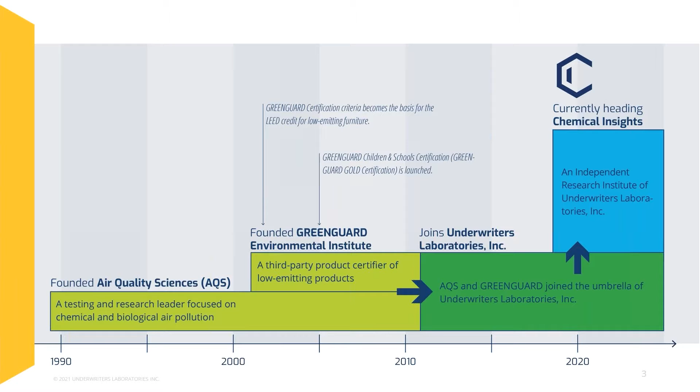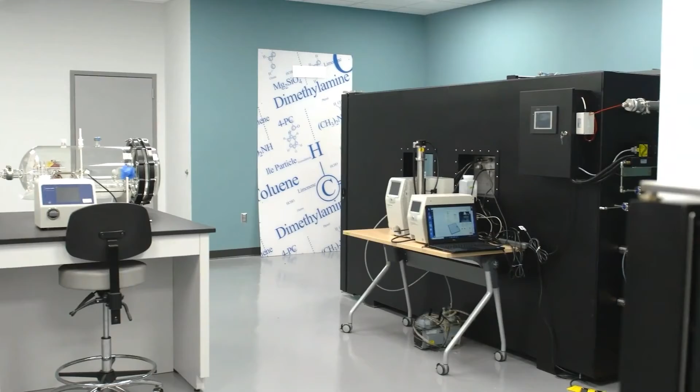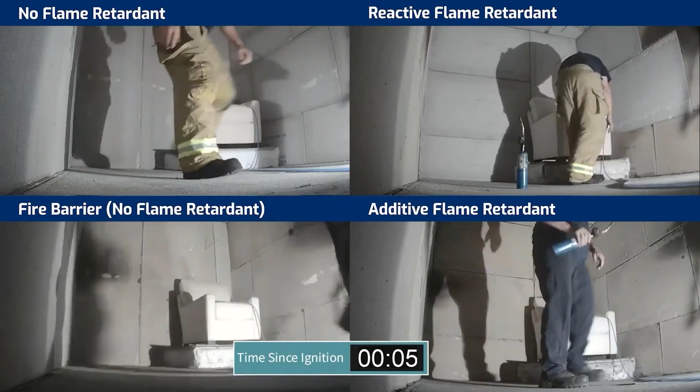One of the technologies that is core to our science are what we call environmental exposure chambers. This was something that was developed a number of years ago by Air Quality Sciences, but primarily environmental exposure chambers allow us to study products under realistic conditions and understand what sort of chemicals, particles, toxins might be being released into the indoor environment so that we can manage them and reduce the hazards. So currently at Chemical Insights, we have a laboratory that houses these exposure chambers of different sizes. We have capabilities through our partnership with Underwriters Laboratories that allow us to expand that and look for other particular hazards such as fire hazards, and gives us a lot of capability to study products and the impact of these products on the indoor environment.

So as we move ahead for today's particular activity, you're seeing a few slides of some of those activities, but we'll be talking about some of these studies and what we've learned in our research that we can apply to ensuring that we have safe environments for all.

Our particular approach to what I call discovery research, we're trying to gather information to fill in the unknown gaps. And the way we do that is, first of all, when we believe there's an issue, we convene stakeholders to help us define what those health risks are and what we can do to establish a research agenda to bring data forward to help us resolve the problem. And once we define that research agenda, we conduct the research, we analyze the data, confirm our findings, and then we share our discoveries with all stakeholders. We're very transparent in all the work we do and want to provide that information out so that everyone can use that to the betterment of their initiatives and people overall. A lot of our work leads to the development of standards or guidelines or issuance of best practices for not only the safe commercialization of evolving technologies, but also making sure that we have safe built environments for all.

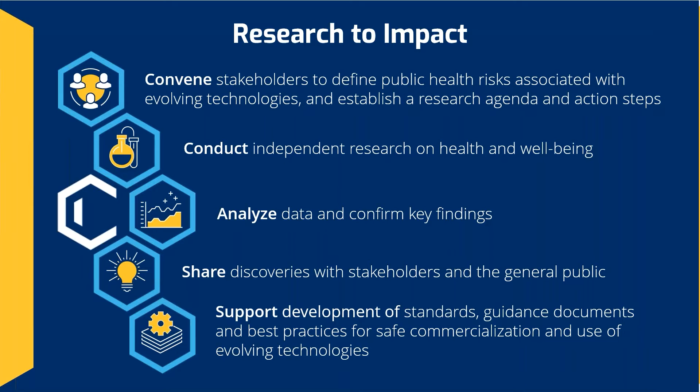So today we have some specific learning objectives. We're going to talk about the expanded role of the designer, kind of as a pioneer with today's opportunities. We're going to identify the health effects of chemicals and respirable particles, things that we're finding in our research. We're going to relate this information that we're finding in our research to best practices, especially for reducing chemical exposure. And we're going to connect all of that information to the practices and guidelines that we have available that you can apply in your day-to-day work in helping us protect building occupants.

So what's the agenda? Well, we have four particular areas we're going to talk about. What's really contributing to poor indoor air quality, what the designer's role can be in helping support positive and healthy indoor air quality. And we're going to talk about emerging risk. What are some of today's emerging risks out there that are contributing to poor indoor air quality, and what sort of mitigation strategies do we know now that can help reduce that risk? And then we'll lead to conclusions and what next steps, and answer any questions that you have.

So first of all, what is contributing to poor indoor air quality? Indoor air quality is very complex, but we do know that indoor air pollution is a public health concern. We know that overall 7 million folks on a global basis die from poor air quality in general, and that's both indoor and outdoor air quality. And the effects of poor indoor air quality in particular can be very significant. We've been studying this issue since the early 1990s, as I indicated earlier.

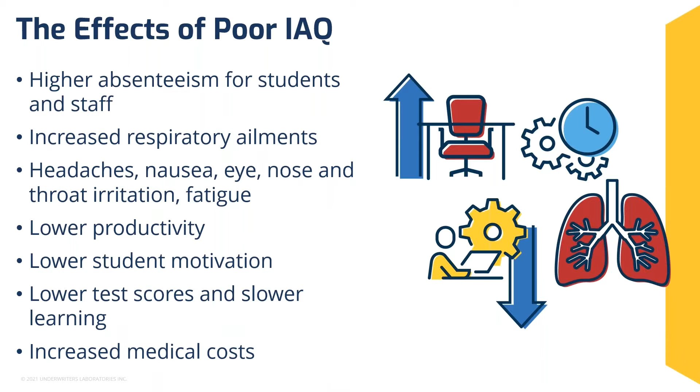So what are some of the common pollutants? Many of you are probably aware of some of these, but pollutants arise from just about all of the building materials and activities that we have going on in buildings. We have pollutants called VOCs, volatile organic compounds. Those are the volatile chemicals that get in the air that you can easily breathe. Many times they have odors. You can smell them, especially from newer products. VOCs, commonly you'll see them from surfaces, flooring, paints and coatings, furniture, all of the types of materials you see there.

And then we have a second category called semi-volatile organics. These are organic chemicals as well. It's just that they are not as volatile, so they don't end up in the air at the higher concentrations that we typically see VOCs. They are in the air, but they also commonly settle into building dust. And because they settle into building dust, people can get them on their hands because they're on surfaces, et cetera. Your hands go to your mouth, and so you can get ingestion of these. These are chemicals like flame retardants, phthalates, PFAS, which are per- and polyfluoroalkyl type chemicals that you're hearing a lot about these days.

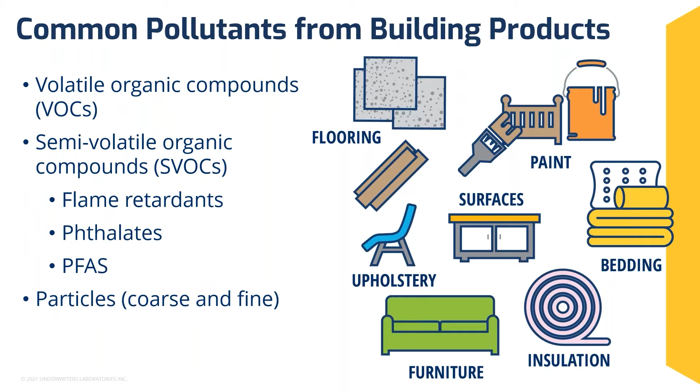So relative to the pollution that we deal with, we believe that you as a designer have a significant role to play. If I could have the next slide. Oops. Oh, okay. All right, I skipped over a slide and I apologize.

So we were talking about pollutants and the particular ones that are there, the VOCs, the semi-volatile organics, the particles, but there are also things like molds and allergens, dust mites, typical molds in general, other biological pollutants like pet allergens and things like that, and carbon monoxide that can also end up in the air. So in general, indoor air quality is a very complex mixture of all of these together, relative to what's going on. And what are some of the known health effects of that?

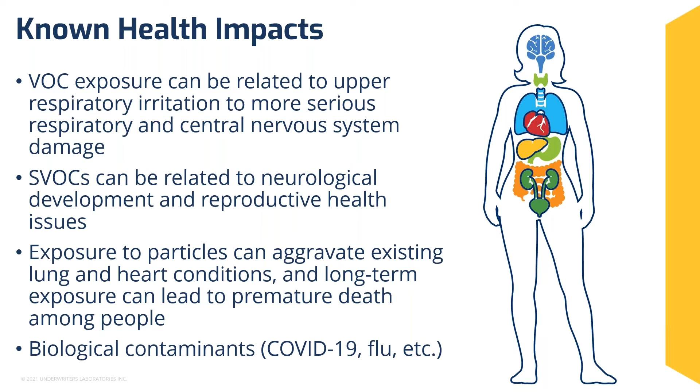VOC exposure definitely can be related to upper respiratory irritation, especially the lungs and pulmonary system. And if they're there in high enough concentrations, they can also affect the central nervous system. That's why you commonly get headaches and things like that. The semi-volatile organic compounds that we talked about can be related to neurological development and reproductive health issues, especially for children. Exposure to particles in particular can aggravate existing lung and heart conditions, and long-term exposure to these particles can lead to premature death. Biological contaminants have definitely come into our world, and we've become very aware of them from COVID-19, viruses, flus, as well as the other allergen type contaminants that we were talking about.

So as we move on to that discussion, we need to understand how people are actually exposed to these pollutants. And there are three primary routes. You can be exposed to the pollutants from inhaling them. You can be exposed from ingesting them, meaning you primarily get them on your hands and your hands touch your mouth and you get them in your system.

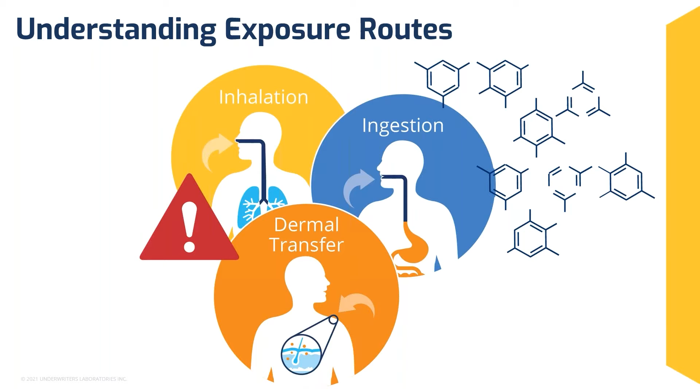And then we have the potential of what we call dermal transfer. So certain chemicals, and flame retardants are one of those, where if you touch a particular product that contains those chemicals, in some cases they can migrate out of the product through your skin and into your system.

So one of the things to remember about pollution exposure is the most effective way to control indoor air pollution is to prevent it, and especially prevent the emissions from all of the products in the first place. We do have ways to manage indoor air quality, and there are four basic ways. And if you remember these four basic ways and take approaches to deal with these, you can really reduce the indoor air quality hazards in indoor spaces.

First is having proper ventilation and filtration of the air supply coming into the indoor environment. The second is controlling moisture. Ideally, we like to have a relative humidity of about 40 to 60% in buildings. We want to make sure we don't have any uncontrolled water leaks long-term that can lead to mold growth and exposure. Cleaning the building, having a consistent and well-defined process for cleaning.

And then the fourth is source control, controlling the sources that you bring into the building. We'll talk about some of these in more depth later. But those are the four primary ways. And what we want to do today in the second part of our course is really understand your role in supporting good indoor air quality, what you can do to help your customers and organizations do the right things to promote good positive indoor air quality and maintain occupant health.

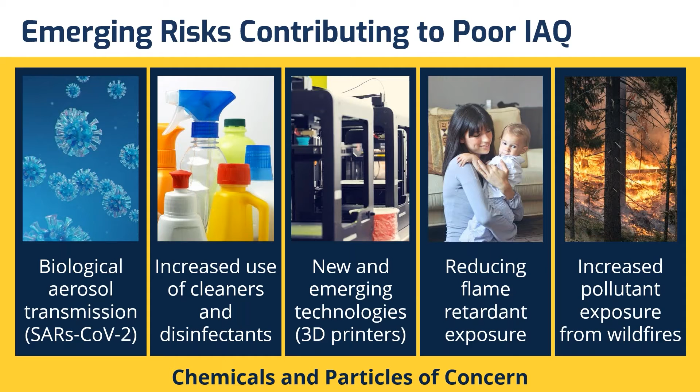So part 3, we will get into each of those emerging risks and talk about them a little bit more deeply. The first are biological aerosol transmissions, again, like SARS-CoV-2. You have to understand aerosols in order to understand what's going on. Aerosols are very tiny particles or droplets that are suspended in the air. And they exist everywhere. We have all kinds of aerosol droplets in the air at any one time. They can come from natural sources or they can come from man-made sources. Unfortunately, some aerosols are detrimental to human health when they're so small that they can be inhaled and deposited into the respiratory system.

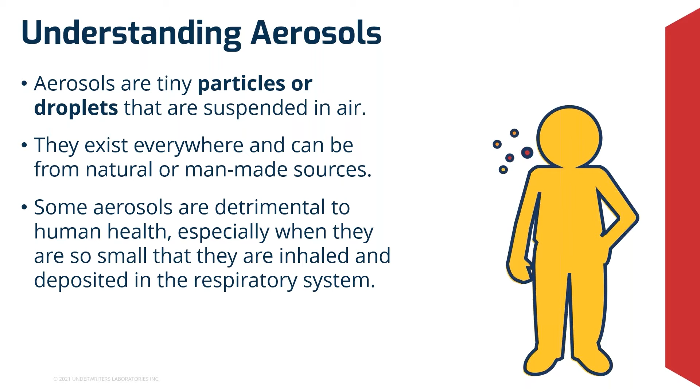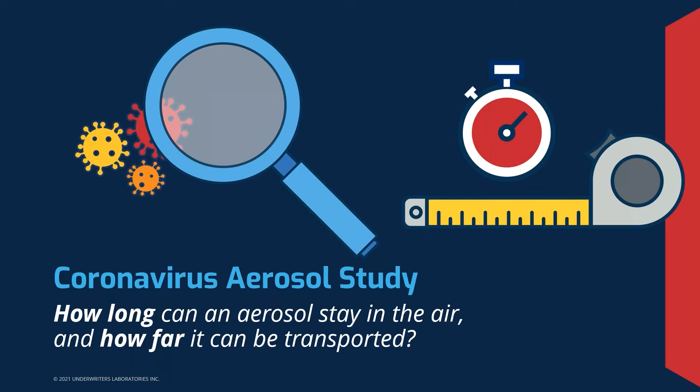We conducted some of the early coronavirus SARS-CoV-2 aerosol studies, where we really wanted to understand how long aerosols could stay in the air. Because if they're in the air, you can be exposed. How long can they be there, and how far can they be transported, and what can that mean? Unfortunately, the dynamics around that particular question are very complex. And the answer to that is based on a lot of different factors. It's not easy. It depends on what the droplet size is, what type of ventilation you have in the space, how rapid the air is moving, how much air is available, what the temperature and the moisture is in that particular air.

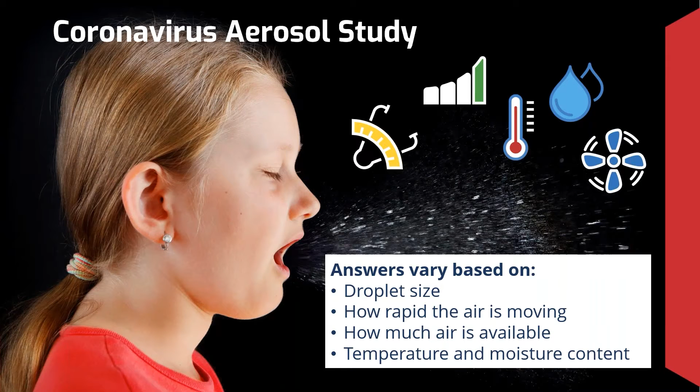So what we're concerned about really are the very fine aerosols, and they can stay in the air from a matter of minutes to days, depending on these particular factors. And in today's world, it's hard to have all of the science to go out and measure those factors so that you know what sort of exposure you are getting. But we do know that the very fine aerosols that get in the air can be there for an extended period of time. So what's the best way to deal with that?

The best way to deal with that, as well as any indoor contaminant, is to dilute the contaminants with good airflow and good air ventilation that's constantly working. And that's much better than using a disinfectant trying to deactivate or kill a biological aerosol, which is a one-time event. Good ventilation is the key to reduction of the risk.

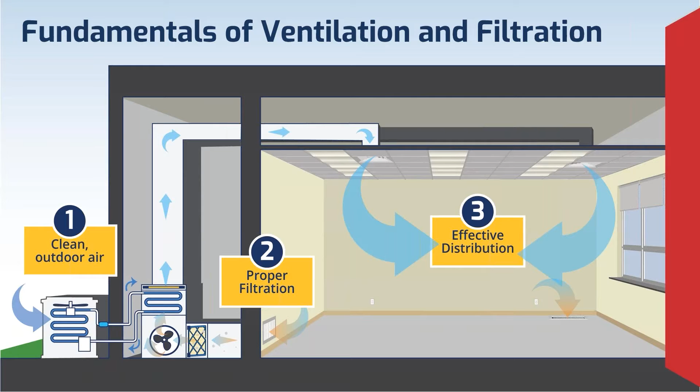So what are some of the fundamentals of ventilation? Well, first of all, you have to supply clean outdoor air to the space. That means bringing in the outdoor air, filtering it properly with good filtration, making sure that you have the highest MERV rated filter that you can, and then making sure when that air enters into the space that it's effectively being distributed down to the levels where people are, whether they're standing or sitting at a workstation and working, that the air gets down to them and moves around them. If you have those three factors, it really makes a big impact on diluting those contaminants, getting them out of the space, and keeping the reduction of the risk effective for the people in the space.

I also wanted to mention this particular phenomenon because some of you may see this going on. There's a lot of use of physical barriers out there in the space, and this is a complex topic because physical barriers in general only serve maybe to stop big droplets that might be coughed out or sneezed. But unfortunately, if those big droplets hit that barrier, they can basically implode and result in many small particles which kind of just go around the barrier. So the use of them would be very, very complex in this particular situation. And in many cases, they may create more harm than good. We know from many studies that the use of high panel systems and office furniture in those types of scenarios reduce ventilation around the people and allow pollutants to increase in quantity. So be very careful with the use of this particular technology.

The next technology I'd like to talk about is air cleaning. A lot of people are using standalone air cleaners in the indoor space, which in many cases can be very good. It doesn't take the place of good ventilation, but it's a good supplement to ventilation. And what do you look for if you want to use air cleaners? Well, first of all, you want to make sure that those air cleaners have been verified by a third-party organization, have a good clean air delivery rate, good HEPA filtration, high efficiency particulate filtration, an activated charcoal filtration opportunity to remove volatile organic chemicals, and that the unit can clean a sufficient volume of space, particularly the space that you're in. And you want to make sure that these units do not introduce ozone into the environment. Ozone is a very strong pulmonary irritant, and we do not recommend that any air cleaners be used that introduce ozone into the space.

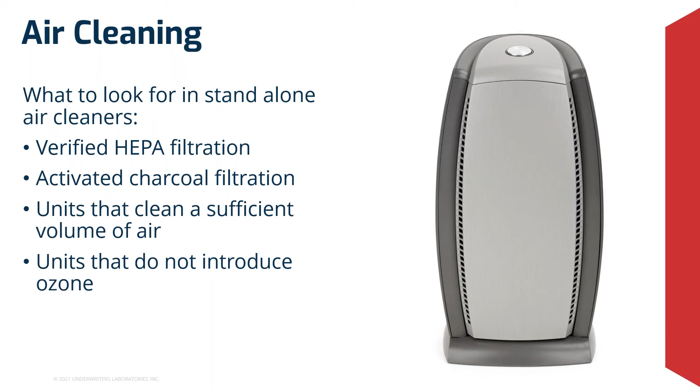So the rule of thumb for air cleaners is that you look for one that has a clean air delivery rate for 2/3 of the volume of the space that you're trying to clean. I've been into schools and places like that where teachers may have a really small air cleaner sitting on a desk, and that's not going to do anything. You've got to have an air cleaner that's really designed for the whole volume of the space. And as I said, rule of thumb, make sure that it's verified to clean 2/3 of that volume.

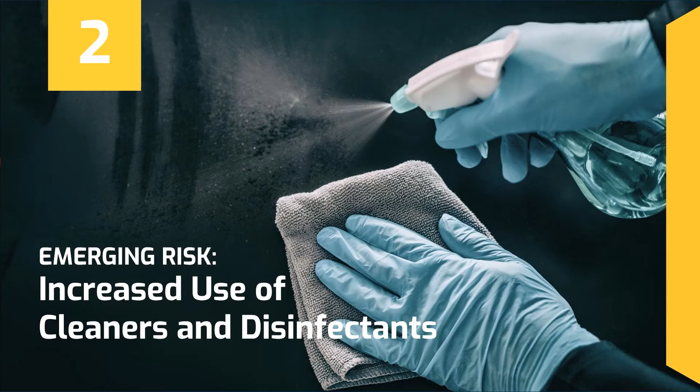The second emerging risk that we're going to talk about is the increased use of cleaners and disinfectants. With COVID-19 and exposure to SARS-CoV-2, we've seen the push for using cleaners and disinfectants in indoor environments. Cleaning gives everybody kind of an "I feel safe" type of scenario. But remember, cleaning is only a one-time event, and cleaning itself, cleaners in particular, can have a negative impact on occupant health, primarily because of their chemical composition.

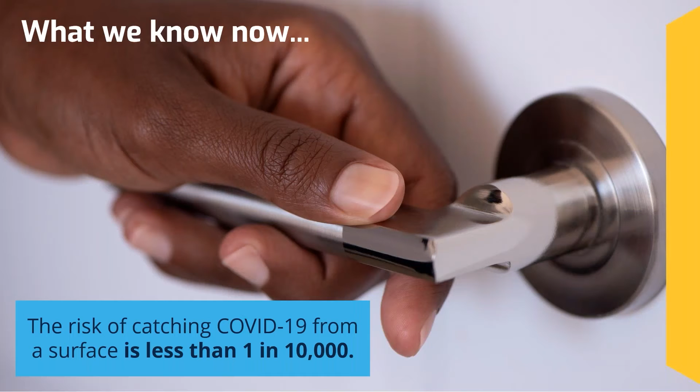And it's important to remember, and this is something we've learned through COVID-19, that the risk of catching COVID-19 from a surface is less than 1 in 10,000. So typically, that's not how people are getting it. What we learned is that SARS-CoV-2 is spread primarily by very fine aerosol droplets in the air that people breathe, not from what they touch. Still, it's wise practice from a cleanliness standpoint to clean frequently touched surfaces such as door handles and bathroom fixtures and things like that.

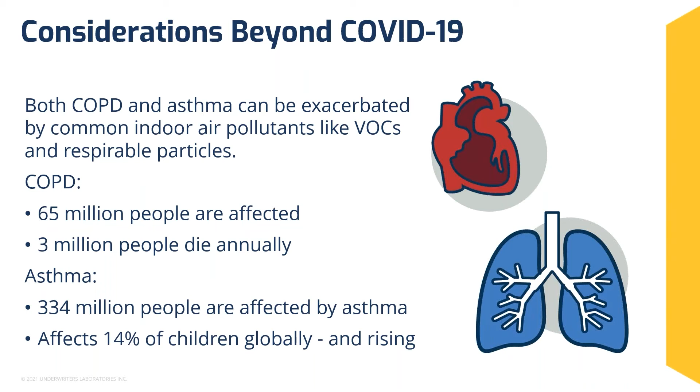Asthma still remains one of the most significant chronic diseases among children and is still the leading cause of absenteeism and emergency room visits by children on a daily basis. And those diseases are also caused by the same things: biological aerosols, chemicals and particles in the air.

Now, what are the primary steps for an effective cleaning and disinfecting process if those are going to be used? And we do recommend that they be used, but in a controlled fashion. First of all, one of the best things to do is to use HEPA vacuum systems, high efficiency particulate air vacuum systems, where you vacuum your floors, textiles and furniture, that you focus specifically on cleaning the high touch surfaces and countertops and things like that, but only use those cleaners in well ventilated spaces.

Make sure you open windows, you have your air ventilation systems on, that you implement routine cleaning programs, that you have a very defined cleaning process. How often are we going to do it? What are we going to do? What are the materials we're going to use? What are the chemicals we're going to use? That you have those defined.

So those are used routinely, and you don't want the situation where people are just bringing their chosen product into the room to clean. We certainly recommend practicing source control. Make sure that the cleaners you bring in are approved by EPA's safe product list and have low emitting, non-toxic chemicals in them.

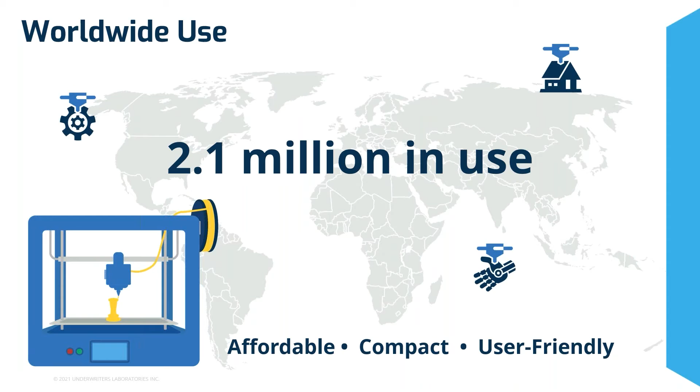non-industrial sort of environments. Unfortunately, through our research, what we've learned is that during the operation of these 3D printers, they do generate a complex mixture of airborne particles and volatile organic chemicals that can end up in the air and provide a complex aerosol for people to breathe. And what does that mean? Well, it means they do present a hazard.

And in particular, when people stand close to them, they're in a situation where they're close to all of these emissions and have minimal ventilation at the particular time. So they do present a risk. We have found through our research that there are hundreds of different VOCs that are emitting, depending on the type of filament that's being used and what's being printed and the length of time a printer operates.

And these chemicals, some of them are irritants, some are carcinogens, meaning they cause cancer, some are odorants with very strong odors that can affect people's health and produce headache and that type of thing. The type of VOCs and levels will depend on the specific printer type as well as the filament in general and the amount of ventilation that's in the space.

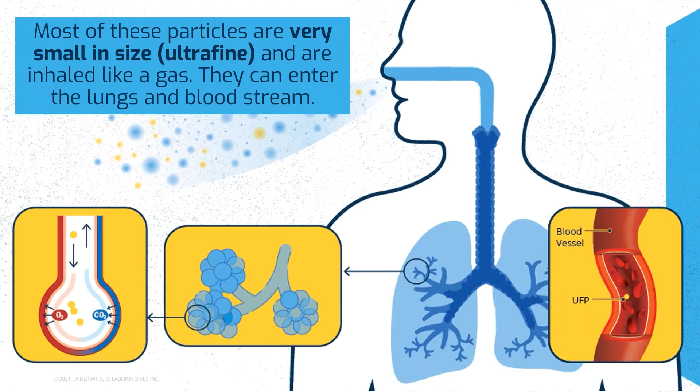Now, in addition to the VOCs, the other emissions released by these 3D printers are the very small particles, and these are called ultrafine particles, and they are inhaled into the pulmonary system just like a gas. And because they're so small, they can enter the lungs and the blood system. They can even get into the bloodstream, which means they can make their way through the body and up to the brain. And just about all 3D printers are emitting these ultrafine particles.

But 3D printing, again, is a great technology. We want to encourage the use of it, but we want to encourage safe use of it. So what are the things you can do in situations where these are being used in the indoor environment? First of all, purchasing. You can have a good purchasing process that defines the 3D printer that you want to purchase, making sure that that 3D printer essentially has been verified to low emission status, and that you know who you're purchasing it from, and that you also specify the right filaments that have been defined by the manufacturer for that particular printer.

You want to make sure you locate that printer in the indoor environment in a space where you are getting a lot of good air ventilation. You may have local exhaust that can take the exhaust out of the building. You may have just good building ventilation that can mix around it, or you might be able to open a window. And then you just want to limit the exposure opportunity for the people that are there. Keep them away from the operating printer. So those are the best approaches you can use.

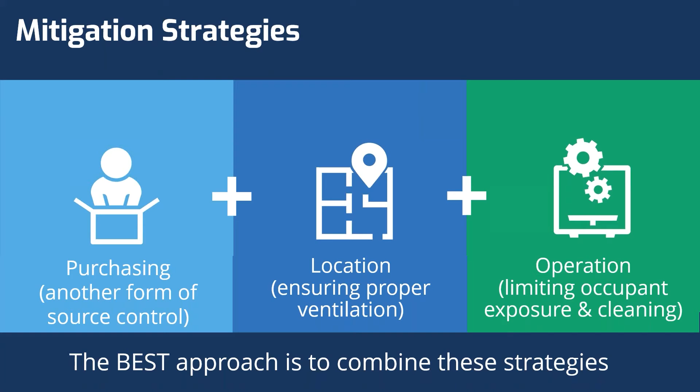And from the safety standpoint, we have various control strategies for minimizing the hazards associated: location, purchasing controls. And beyond that, we can get into more significant engineering controls as we talked about, exhausting printer emissions. Some printer manufacturers now are providing exhaust systems with those printers.

And, you know, we can even get down to requiring personal protective equipment if necessary, but obviously we want to avoid that in the non-industrial environments, and we can do that through some of the control processes we've been talking about. So purchasing, and I said select printers and filaments that meet low emission status. There is now a standard in the marketplace. It's an ANSI standard 2904 that defines what a low emitting 3D printer is.

It has a list of just under 100 different VOCs and criteria, emission criteria that printer has to meet. And printers can now be verified or certified by third-party organizations to meet that standard. So we say, make sure you consider printers that are being tested to that particular standard and have the verification information. And you can also put that into your purchase specifications. You can consider printers that have the integrated enclosures that have an exhaust system, filtration system. They are available, but only choose them if they've been verified by the manufacturer to work.

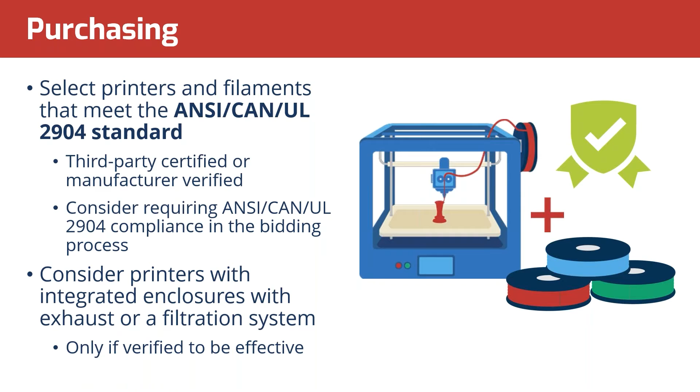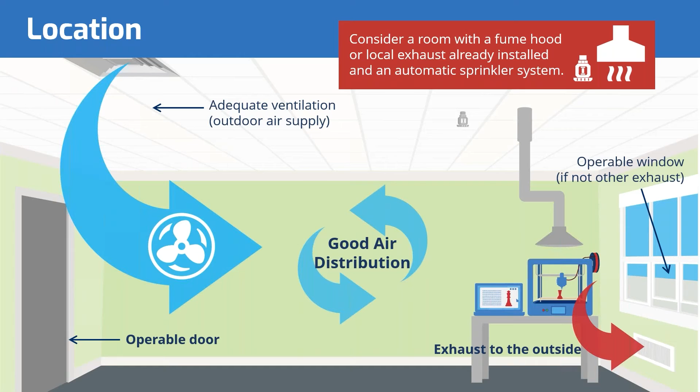Now, location, which was the second control strategy, again, making sure that it's put in a place where you have good air, you have an operable door, you have good clean air coming in, that air has good distribution through the space around the printer, and that the printer be located near a window that you can open if that's an opportunity, or potentially with a local exhaust that can exhaust the emissions to the outdoor air.

Operation of the printer is extremely important. We want to keep observers away from the operating printers. So some ways to do this are to consider the hours of operation. Some people are actually putting cameras on these so that children in particular or observers can see. They like to get in and see the objects being printed. So you can actually have a camera that people can observe and see that without having to get up close.

It's important during operation of these that the surrounding environment is kept clean, and that's cleaning the surfaces with a wet cloth, vacuuming with HEPA filtration, and anyone involved should wash their hands after working with the 3D printer and various filaments, so that you don't get that ingestion type of exposure scenario that we were talking about before, from your hands to your mouth.

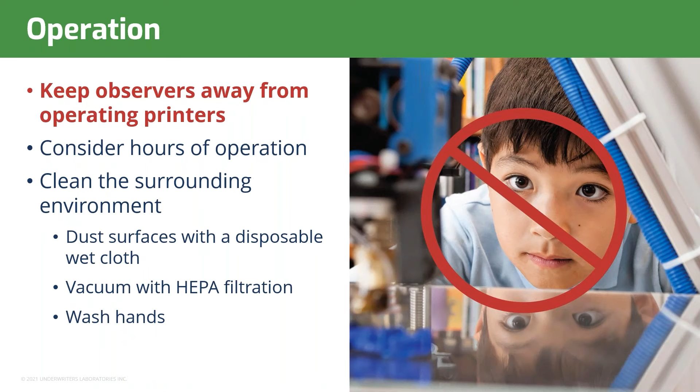So what's another emerging risk? Another emerging risk that we have been focused on is how to achieve both chemical safe and fire safe upholstered residential furniture. And when we think about it, a lot of people don't think about fires these days, but we have a significant number of residential fires. And when a death from a residential fire happens, can you guess what the leading item is to first catch fire if there's a flame available?

And probably when you're thinking about that, I don't know what you're thinking. You may think bedding, you may think something flammable like gas or some sort of object that may be associated with cooking. But in reality, when the flame is present in a residential home from any source, could be from a candle, could be from an electrical spark or anything like that, the first item to catch fire is upholstered furniture. And we have a lot of upholstered furniture in our residential homes. But it is the first item to catch fire, and it is associated as a leading cause of death from residential fires.

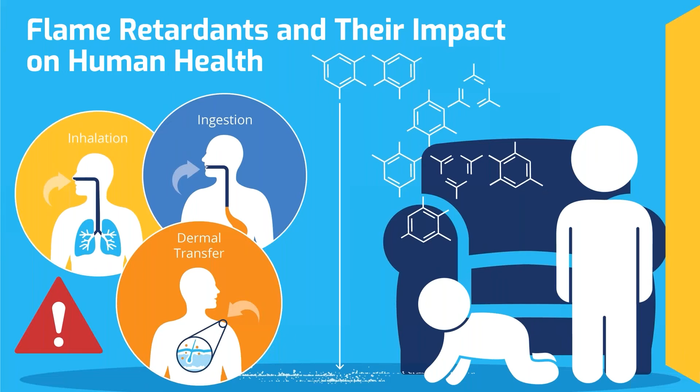So as a result of that, we know over the years that flame retardants in particular have been put in our consumer products, not only our residential furniture, and more specifically the polyurethane foam padding, because that is an organic fuel source for fire. Flame retardants have been added to many, many other consumer products in our homes as well, basically to retard or delay the ignition of a fire. But we've learned through the years that flame retardants can have significant impact on human health, and that people can get them through inhaling them, through ingesting them, or through dermal transfer as well.

So we have studied this particular issue very significantly. We wanted to understand how people actually were getting exposed to flame retardants, at what levels they were being exposed to flame retardants, and what we could do to reduce exposure to flame retardants, yet maintain the fire safety associated with furniture, since it is so flammable.

And so we actually studied this over a 5 to 6 year period with various academic institutes, where we manufactured upholstered furniture using different techniques with and without flame retardants, with some of the newer flame retardants called green flame retardants that get absorbed, that are structurally attached in the foam and don't have the ability to bloom out.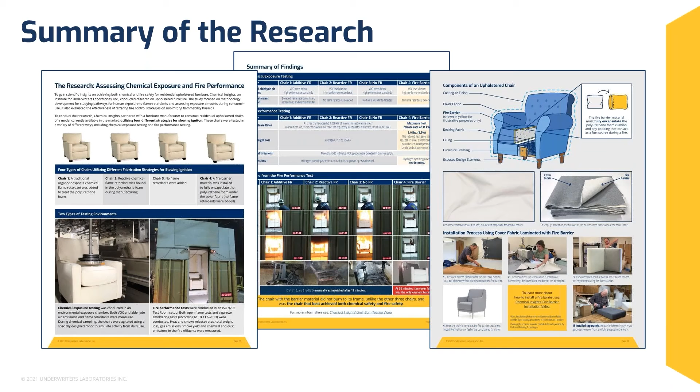So we learned a lot from that particular research, and we learned that in general, flame retardants weren't necessarily necessary. We didn't see much difference in the burns of the furniture if they did or they didn't have flame retardants. And so under that scenario, the question, well, why are we using flame retardants? Okay, well, let's not use flame retardants. But what we learned is that if we weren't going to use flame retardants, we could use a barrier material that had a significant and remarkable impact on the reduction of fire from the burning of upholstered furniture.

So this particular video that we're going to show you shows you how a fire barrier is actually installed in residential furniture.

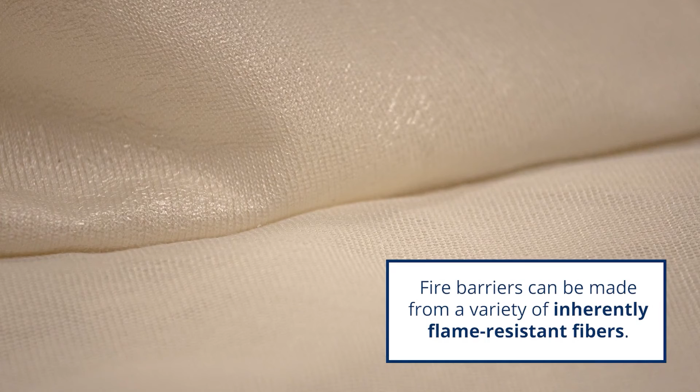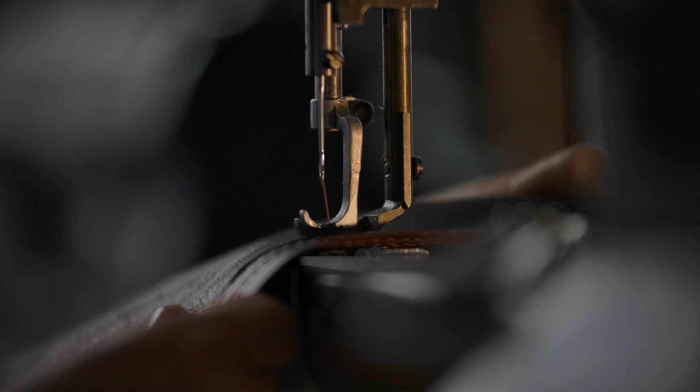New research has found that use of a fire barrier in upholstered furniture successfully addresses fire safety concerns without the use of chemical flame retardants. So how does a fire barrier get installed on an upholstered chair? Let's take a look. Fire barriers can be made from a variety of inherently flame-resistant fibers, including carbons, polyesters, and fiberglass. These barriers should be soft, pliable, and drape well for optimal results. The process of fabricating the components has two options. First, the barrier can be independently installed, followed by the addition of a cover fabric. Alternatively, the barrier can be laminated to the cover fabric so both are installed together.

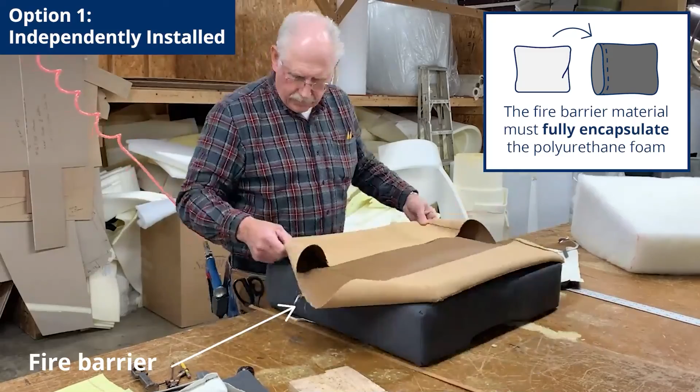The fire barrier must fully encapsulate the polyurethane foam or cushion of the chair, which can act as the main fuel source during a fire. The fire barrier is designed to prevent or delay ignition and can successfully reduce the fire growth rate and fire size if ignition does occur. Once installed, the fire barrier will not impact the final look or feel of the upholstered furniture. The fire barrier offers a solution that achieves the convergence of chemical safety, fire safety, and peace of mind.

Okay, so fire barriers are currently available in the marketplace to be used. And taking all the knowledge that we learned from this research and with a strong advisory group from the design, manufacturing, and public health stakeholders that were working with us, we produced 2 documents on this research. One is a guidance document on how to manage fire and chemical exposure risk associated with residential upholstered furniture. It gives a little bit of detail into the research and our findings and application of that.

And then we took that and created a toolkit specifying residential upholstered furniture to safeguard human health and well-being, specifically for designers and users such as yourself to understand this particular issue and the simple decision process that you can go through to achieve the safety level needed for your particular clients. We had this document reviewed by the American Society of Interior Designers, their advocate for design council, and we were very appreciative of that.

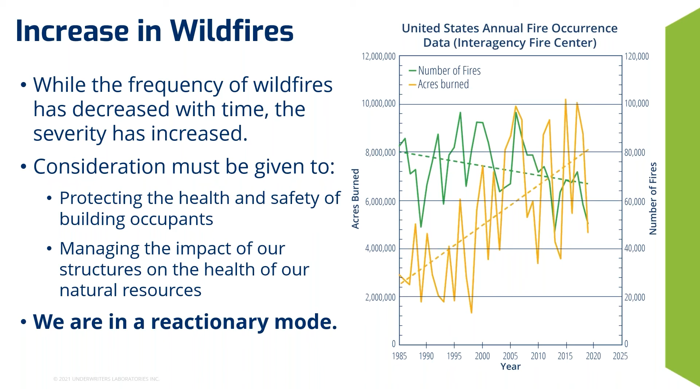So while the frequency of wildfires has decreased over time, the severity has increased. They're burning hotter, they're burning more acreage, and we are very much in a reactionary mode on this particular issue. But we need to give a lot of consideration to protecting the health and safety of building occupants in these particular areas and managing the impact of our structures, both on the health of the occupants and the impact of those structures on the natural resources if they do burn, because they can be sources of pollution that are introduced

into our environment. So with wildfires, there are a lot of chemicals of concern. During the fire itself, a lot of emissions end up in the air, which are particles, chemicals, reactive species. And then when structures get involved, we have secondary exposures. We have all of the chemicals we've been talking about, like flame retardants and PFAS and phthalates and things like that, that become exposures, not only to people that may re-enter a home after it's burned to some degree but still usable, or if structures burn down, then all of those chemicals are there to enter the soil and our groundwater. So there is a lot of concern about this particular issue.

We've been working on various aspects of this, and one, because there are so many wildfires in a number of areas, a lot of people were reverting to using a very simple air filtration device called a box fan, where they were taking fans and adding a filter on it to filter out the particulates that were coming into their homes. And that's because many people could not afford going out and buying a $200 or $300 air cleaner, and also because in some environments they just weren't available. The supply wasn't significant enough for everyone that needed one.

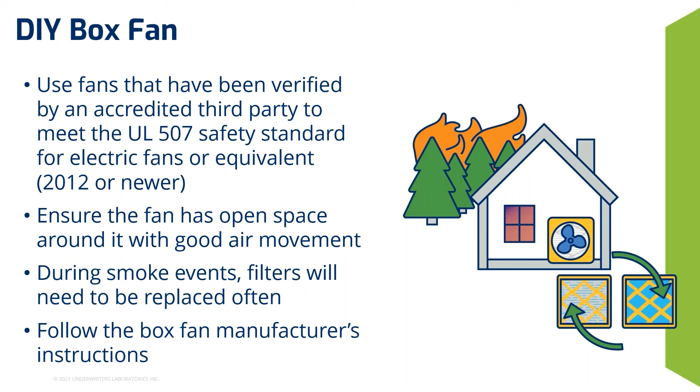So we do have a report on this if anyone is in a situation where they want to be using box fans as filtration devices that they make themselves. So that particular issue is something we've been studying. And then I want to come back to the overall fire scenario, because of the wildfire, because of the severity of fires, the issue that we have in not being able to escape from our homes very quickly. I'd like to revisit how fast flashover can occur, because I think this is something people just don't think about and need to think about.

And our homes today are full of synthetic products, you name it, right? I mean, 30 years ago, 40 years ago, grandma's home, we used a lot more natural products, actual woods, cottons, and things like that. And today, much of that has moved to synthetic. And so in grandma's home, maybe we had 30 minutes to get out because flashover occurred very slowly. But in today's synthetic world, we have less than 5 minutes before all those materials catch fire and create not only the hazardous flames and heat, but also toxic smoke that originates from all that burning.

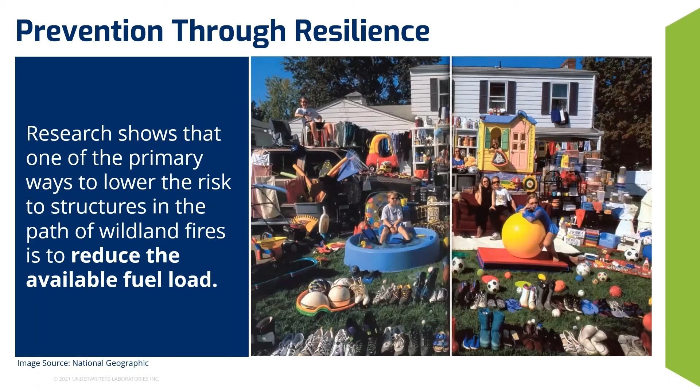And this slide just kind of reiterates that. We know that homes are just full of synthetics overall. You can see all these types of products. And when we're talking about everyday living in our homes, but also about wildfires and the growth of that particular risk, we want to think about making these homes more resilient, and what we can do to lower the risk of fire hazards and death if we're in the path of wildland fires. And by doing that, we basically need to reduce the available fuel load, which are all of these synthetics.

Okay. Now, the next step is basically just to sum all this up. What are our conclusions? What are our next steps? And, bottom line, everything that we've talked about from all of the risks, the indoor environment is a very complex environment. And we're breathing on an everyday basis a very complex mixture of pollutants that contain chemicals as well as particles. And there are all kind of synergistic reactions or things that may be occurring that we don't know yet. So reduction and prevention, minimization of exposure to those pollutants is extremely important.

The best advice that we can give you, and the way to manage that: practice the 4 techniques for managing and having good indoor air quality, ventilation, moisture control, cleaning, and very importantly, source control. Okay, so

last but not least, I hope that you guys are aware of many of these emerging issues, and we hope that you understand this and that you can be a pioneer in helping us carry the message of these emerging risks and what we can do to reduce them, and have those discussions with your clients in a positive way to take the right steps and do the things to reduce exposure and hazard to your health and even death from these particular challenges that we're facing.

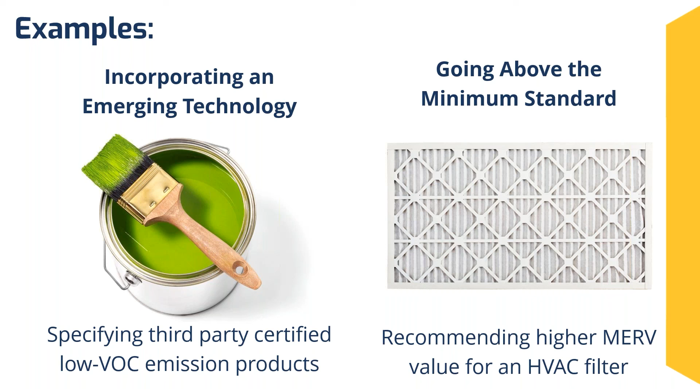In air cleaning, again, there's not a regulation, but we see people going above the minimal standard and recommending the highest MERV value that they can for the HVAC filters, so that we can filter out those particles and even down to the respirable level.